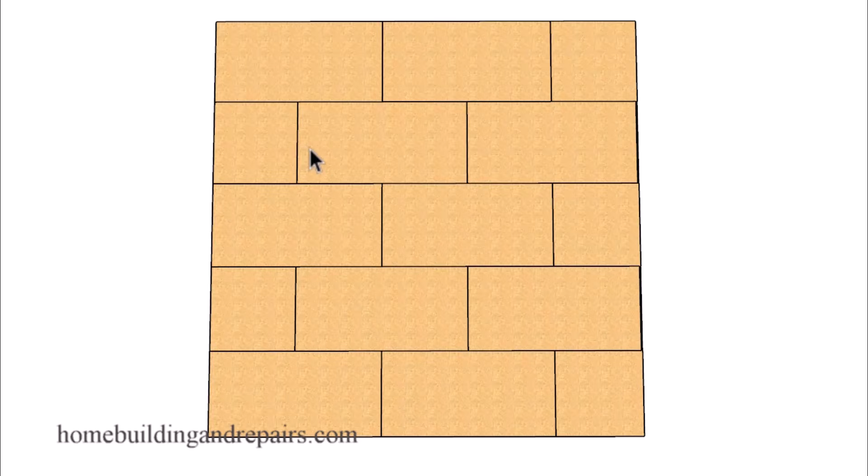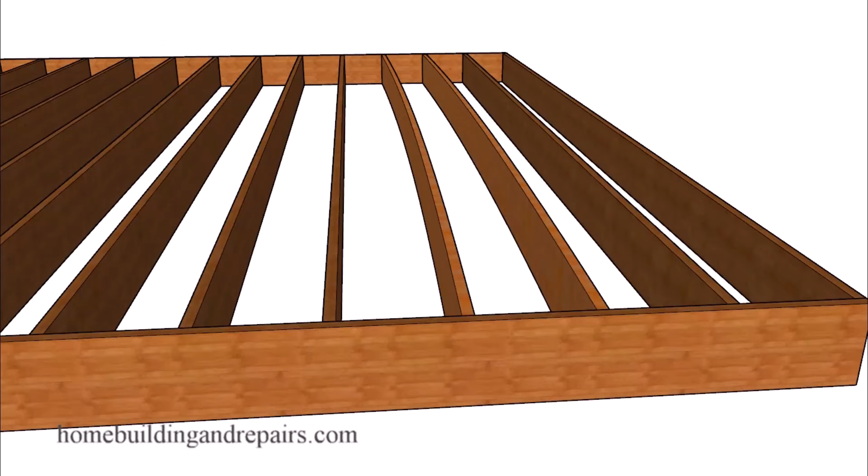Got a floor joist that's bowed to the left or right? Before you touch it, a quick warning. If the floor isn't sagging or damaged, you might want to leave it alone. Moving a joist is a major task.

To start, you must remove all nails from floor sheathing above the bowed section. If you don't, that joist isn't going anywhere. Also, be prepared: if your plywood breaks are located directly over that bowed joist, you might end up replacing sections of the subfloor. Next up, let's take a look at how to move it.

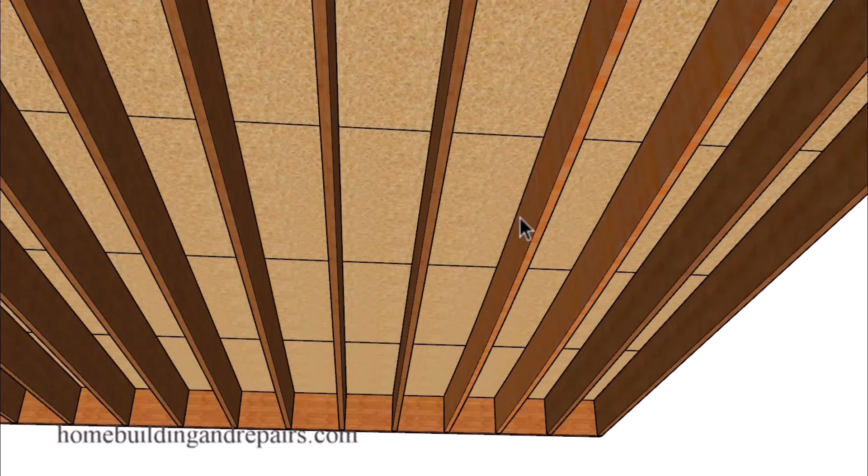You'll likely be working from below, so your goal is to force the center of the joist back into alignment. First, install solid blocking between your straight reference joist and the bowed one. This provides a stationary point you can push up against.

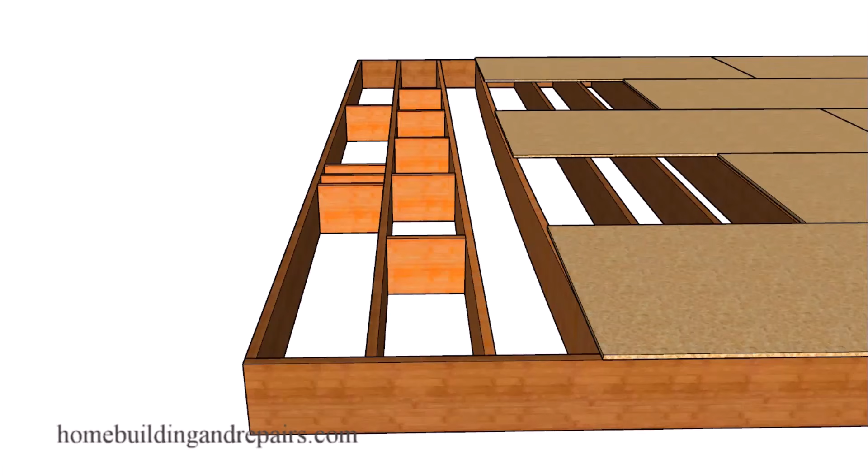For the actual move, don't use a hydraulic jack. They usually don't work on their sides. Instead, use a screw jack, or what I like to do, use temporary blocks to straighten everything out, and then I will remove the temporary ones after I have nailed the floor sheathing.

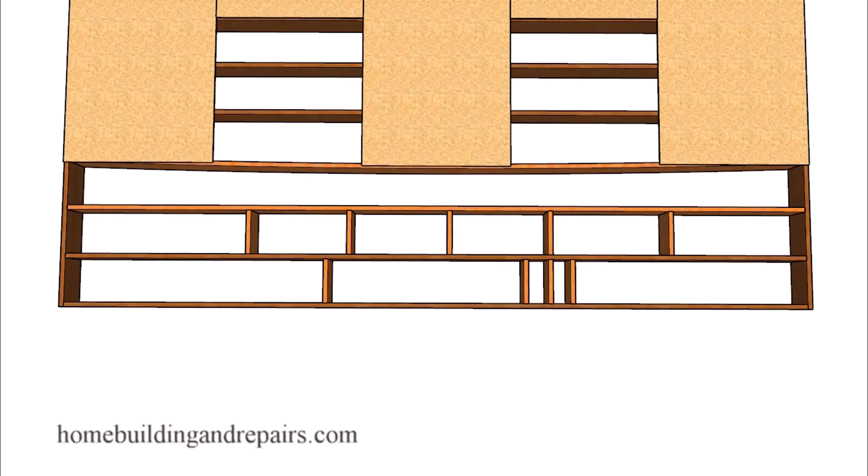If it won't budge, double check for missed nails in the sheathing above. Even one or two nails can lock the joist into its bowed position. Or subfloor adhesive between the bottom of the plywood and the top of the joist could also be a problem.

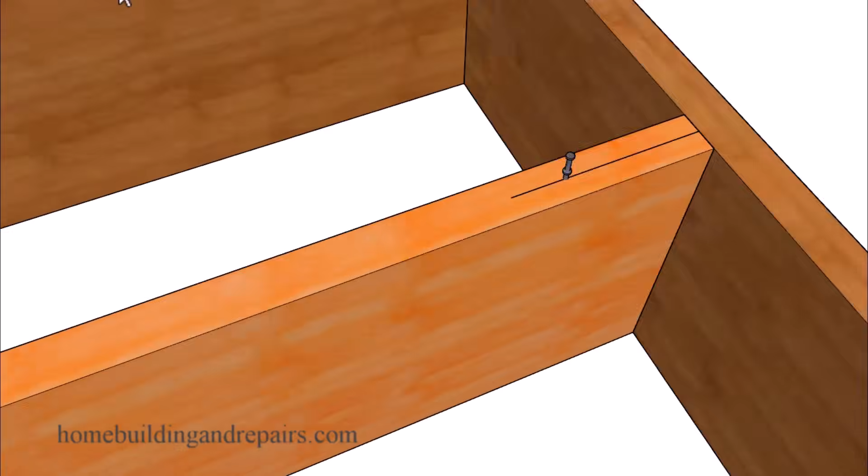To ensure the joist is perfectly straight, just don't eyeball it. Use a string line and attach a screw or nail to the center of the joist at both ends, as close to the bearing point as possible, and then pull the line tight. Once the string is tight, move the center of the joist until it aligns perfectly with the line.

Once it's straight, install permanent blocking to hold it there. And be careful not to install too many blocks, because the more blocks you add, the higher the chance of the floor squeaking later.